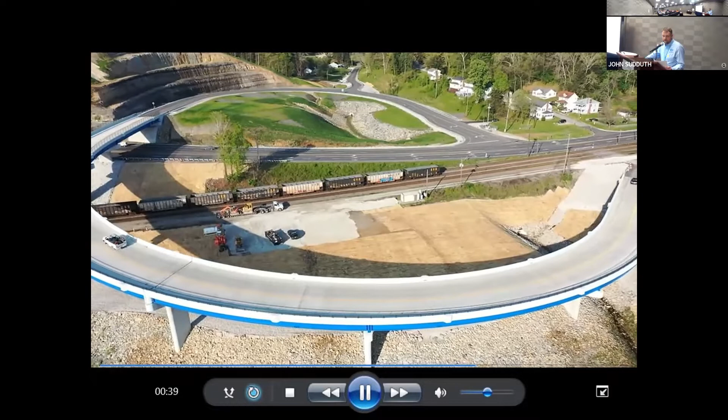Everyone for being here. We're here for the structures track. The project we're talking about today is Greenup County, Kentucky 244 bridge over US 23 and the CSX Railroad.

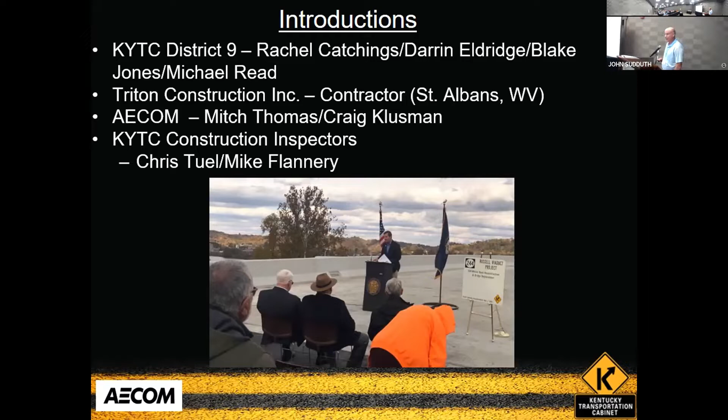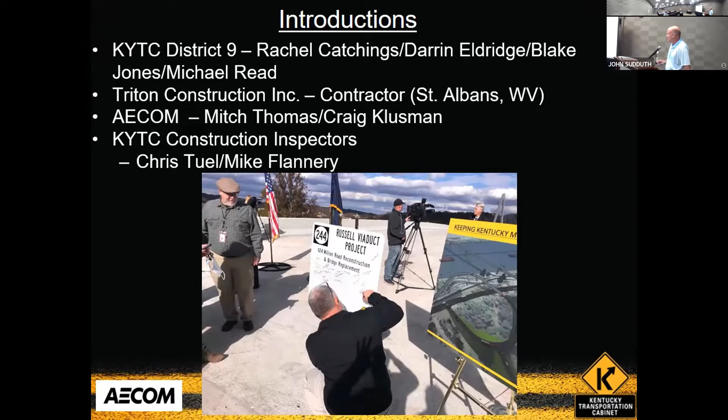And had a nice sign there, presentation, Rocky and everybody was there, so it was pretty cool. So as soon as the governor left, all of a sudden you got this guy up here, he's facing the sign - the bridge hadn't even opened, and he's already writing on the sign over there. Yeah, he's sitting up here in the front row. But yeah, just a little bit of fun. I thought that sign was pretty cool to show, and I think a pretty good presentation to everybody involved with the project. Michael.

Working, yeah. Okay, so we just want to give you all kind of an overlay of the area, just a lot of stuff going on up there. So as you can see at the top, there's the old Russell-Ironton Bridge, and that was actually replaced by the cable stay, the Oakley Collins Memorial down there. You can kind of see our bridge that we're replacing there is the 244 viaduct bridge.

And then right off to the side of that, which you'll figure out later on, there's the mountain right there, that's where we ended up with a big rock cut. I definitely want to point out the CSX tracks there - there's 3 tracks that run through there. They're pretty active, I think they get 30-some trains a day through there. And obviously you got US 23, and then at the top up there, that's actually one of the few other ways in and out of Russell.

That's the Ferry Street underpass, which is vertically and horizontally deficient as far as width, which is what makes this bridge so important for getting in and out of Russell. It's the only real way for oversized vehicles, or even trucks of any sort, to get in and out. You're between a rock cut and a hard place, river, railroad track, for ingress and egress of larger vehicles into downtown Russell. So those four key elements really hit home doing this project, which we'll talk about more as we go.

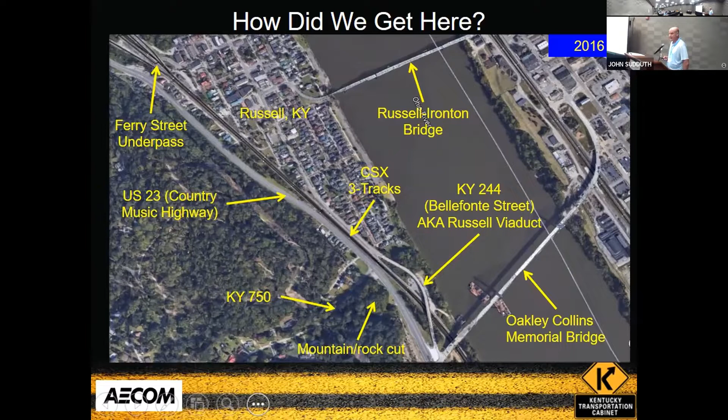So you can see that was from 2016, so everything's changed since then.

Moving forward, you had the Oakley Collins, the cable stay structure from ODOT that linked Russell and Ironton up, replacing the structurally deficient bridge that went to downtown Russell. Initially it was way over budget and had to be rebid. At the time we were URS or AECOM, so Craig and all the structures people looked back and did some value engineering to knock some cost off of it, like reducing shoulder widths and sidewalks and things like that.

Construction ran for a few years, and one of the things that drove this whole project was it was driven by ODOT, then tying across to Russell, Kentucky. We call it Russell to Ironton, not vice versa, since we're on the Kentucky side. There were intersection issues with Kentucky 244, US 23, and the new cable stay structure coming from Ironton, Ohio.

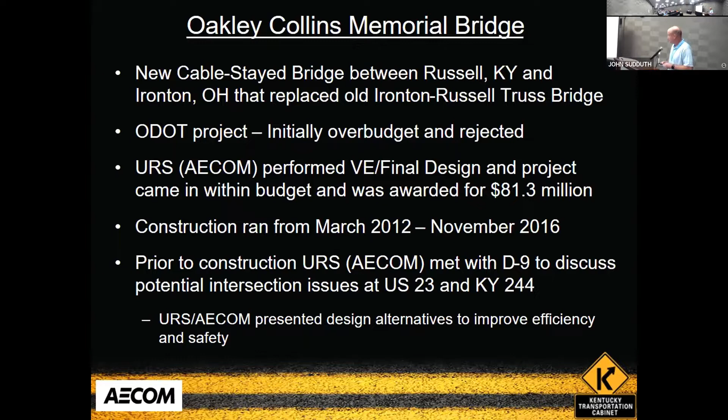If you look right here in the front of the picture, at the bottom of the screen, that's the new cable stay. You can kind of see the old viaduct bridge right there that it's replacing. It made a very interesting intersection there, basically a T, but then you throw an extra leg into it. The actual Ohio River Bridge is also on a skew a little bit, so the lanes really didn't line up much at all. And then you also had the old Russell Ironton Bridge at the top, which isn't there anymore, as you're about to see.

So one thing key in on was this crazy intersection here. We've got some good slides to show it, and what happened with it.

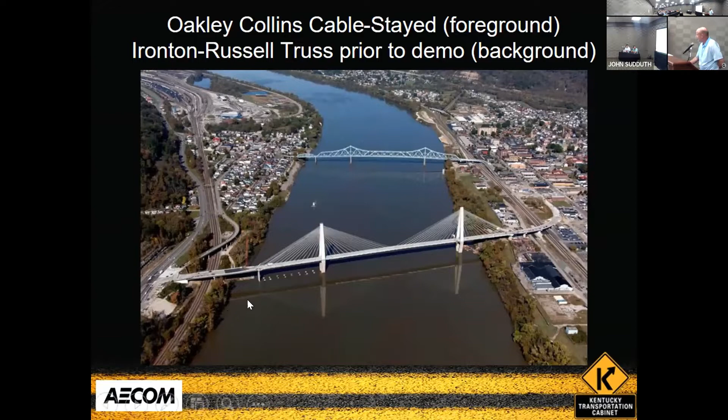So some trivia if somebody's scoring at home, and if you want to win a free lunch or something: it was the first bridge across the Ohio River between here and Parkersburg to Cincinnati. So it's kind of cool. It was there for a long time, and she was officially demoed in 2016.

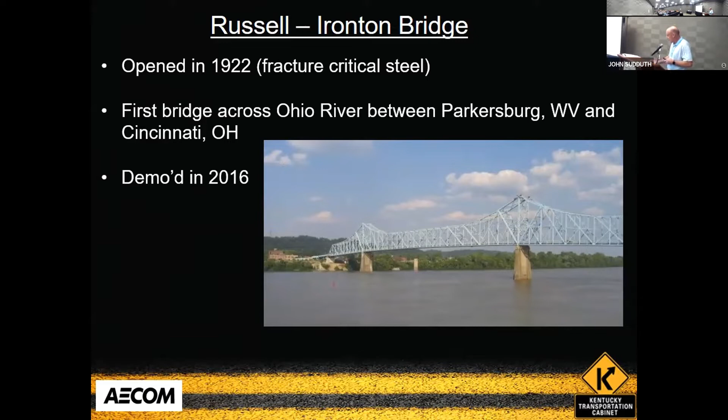One of the rules for horizontal intersections is 15 degrees skew. I don't even think this was in the ballpark, in the other direction. One of the things with this, it's a crazy intersection, we have a different term for it. I'll show you a little bit later.

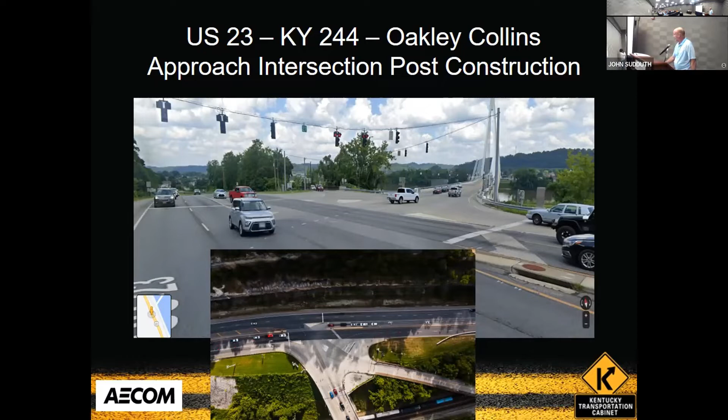You're coming here from 244, if you want to continue north on US 23, it's just severe skew. Every time we went through there, I had no idea if I was going the right way or the wrong way, because you're not even pointed in the right direction there. So we saw this, talking with the district, we need to get this on the books and get this issue resolved before it gets worse, because obviously when you have that tremendous skew in the intersection, your traffic operation is going to be extremely poor, which we'll talk about here in a second.

So just some of the issues with the bridge at the time: with 244 being structurally deficient, the weight limits were pushed way down at that time. The bridge was literally moving over the railroad track, and just all kinds of other things going on.

This section of US 23 has the highest ADT in District 9. So trying to cross back over 23, which we'll show you in the video, and then maintain traffic into and out of downtown Russell, with trucks, delivery, CSX, and so on. If you see it there at the bottom, that's a technical term we put there, it's a Muy Loco intersection. So by the time you see the sign that says Bienvenidos Kentucky, you're in the Muy Loco intersection, and you're going to go crazy - that's what's going to happen eventually.

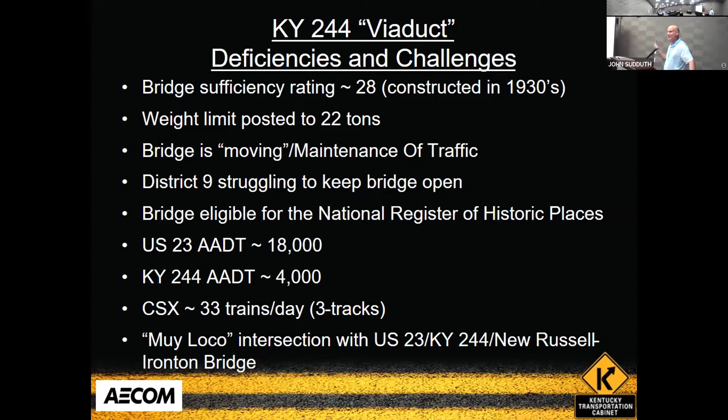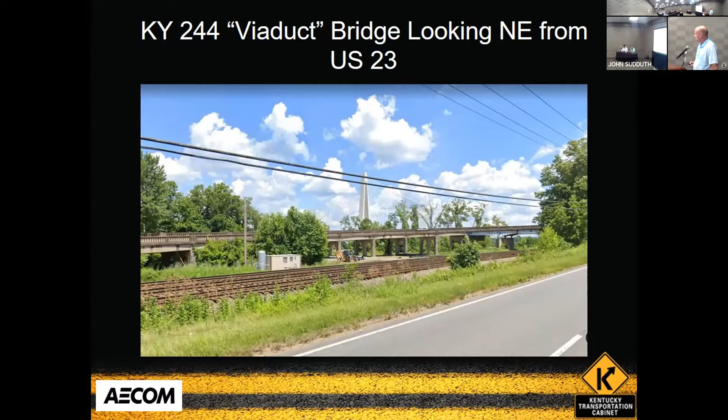I just wanted to show a view from US 23 of the old bridge. It had 19 spans, and the next picture will show a closer view - it had a pin and hanger steel span over top of the railroad. There's actually 3 spans there, but that was one of the main issues - they couldn't check the pin and hanger and didn't really know. We had quite a bit of other issues with it too.

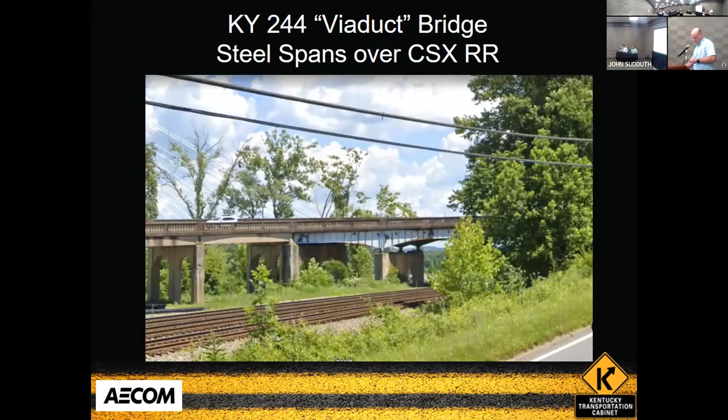We meant to patch a hole in the deck and ended up pouring 10 yards of concrete. It's kind of fairly rotten, honestly it's a maintenance headache. Here's another view looking down at it.

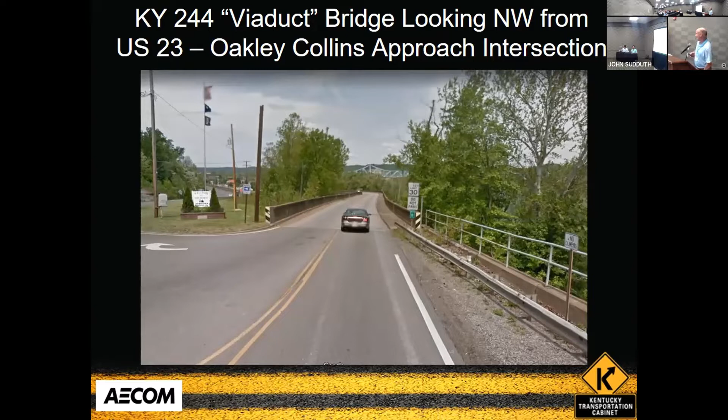As Mitch mentioned earlier, it was actually moving - there's a triangular wedge section that we ended up bolting there, and it's actually scooting over. You can see it in the sidewalk, the railing - several, maybe 6 inches, a decent bit, and it's moving out. Many times we were out there on site visits, you could literally feel it vibrating. Still, you can feel it. Especially if a truck goes over it, the whole thing bounces up and down with you.

So some other issues here, just kind of summarize again. Going forward to final design, we were obviously selected to do that. Myself and Craig led our side as a consultant in the district. We had Michael, Blake, everybody else, Rachel, Darren, on the district side.

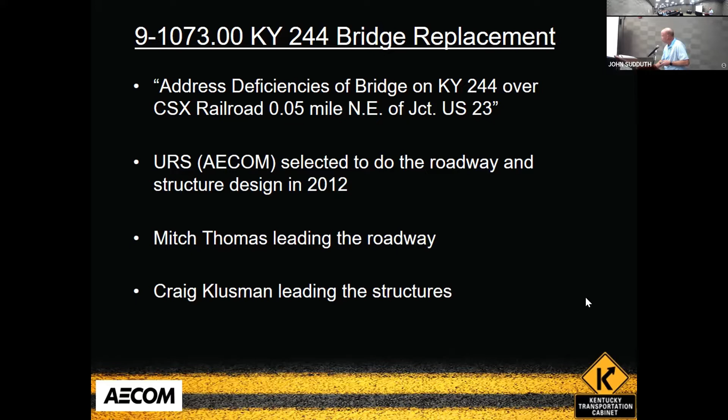So just to run through these preliminary alternatives real quick - we looked at 7 alternatives. For the initial alternative, remember the 4 key things: we've got to get people in and out with large trucks to CSX and the local gas stations, be able to maintain traffic, and so on.

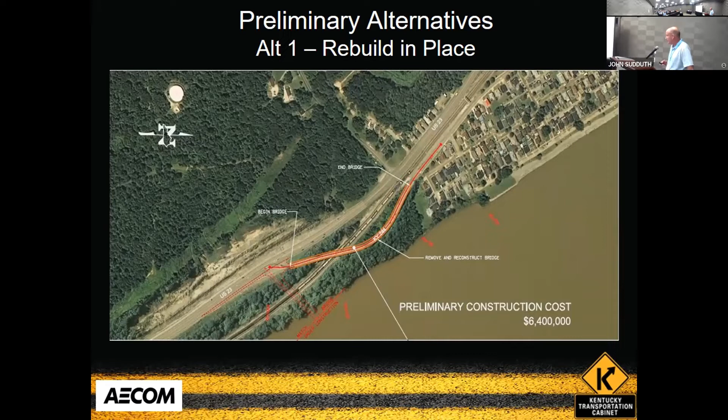One of the alternates - we looked at anything and everything because you're literally in a very tight spot there. You've got the river, rock cut, US 23, very active rail and so on. So we said, all right, let's start from the top here. This option just basically put it back in place, but then by doing that, you've got to close the roadway. That didn't work out too well eventually.

So we looked at alternative 2. Michael talked a little bit about this, using the Ferry Street underpass - you curve through here with the S. We actually met with Russell EMS, and they even attempted to deflate the tires and tried to go through it, and they still could not get through due to the curvature and the vertical. It just did not work, so that wasn't a good idea.

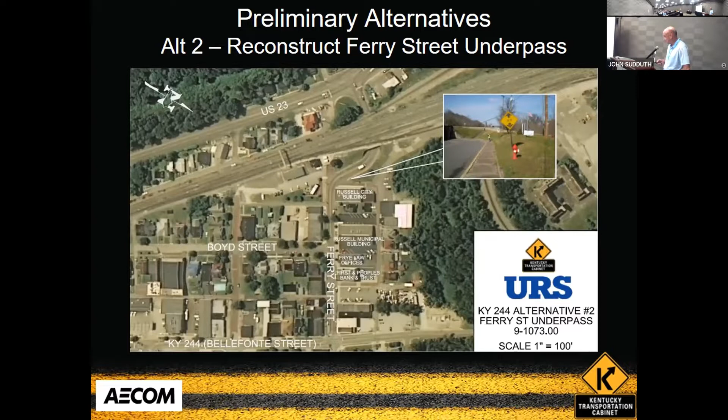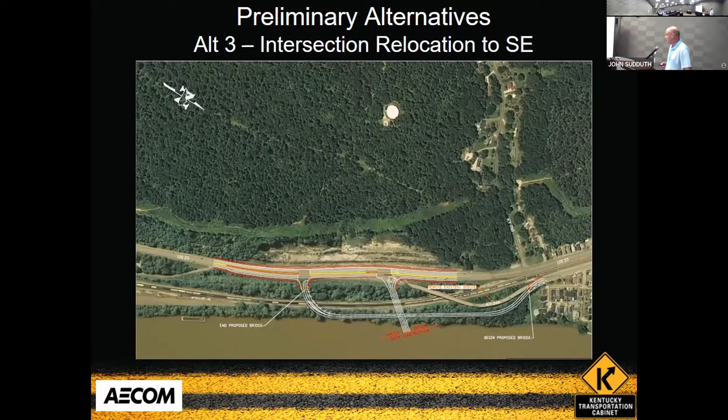So then we looked at this one - started to get a little crazy. We said, hey, let's go underneath the new cable stay structure and then come back and tie US 23 just to the east of the new bridge. Of course, these drawings are back in preliminary line and grade, where the cable stay structure was not yet constructed. This was extremely expensive back then, and you're running everything down in the river, and you've got to shoot up over the railroad, and your grades just didn't work out too well. But it was an idea.

So then we looked at, hey, let's find that sweet spot crossing 23, so we can clear the rail, we can clear 23, get our vertical where we want, and then swing back over to more of a traditional type intersection here where we straight-line with the new cable structure.

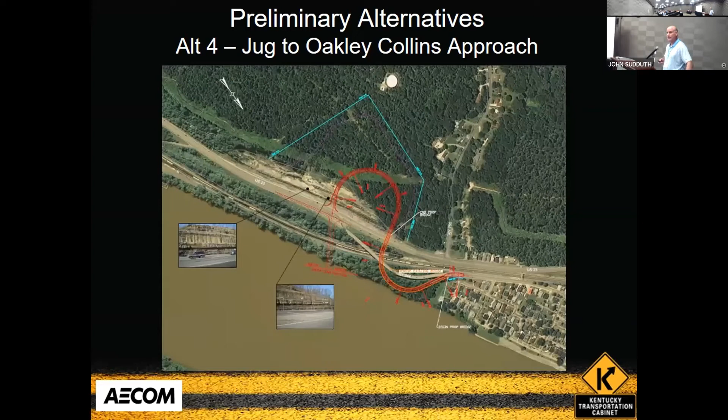It looks pretty on paper, but then you start doing all the engineering, you're talking about over 1 million yards of cut that affected a water tower and just major impacts with this.

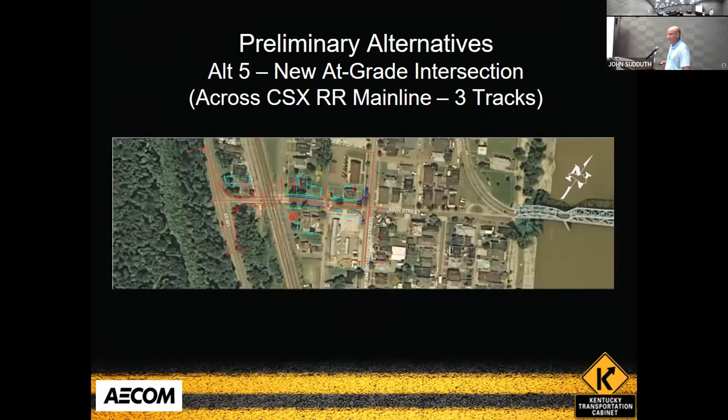So we looked at putting in an at-grade crossing, which used to be there, and CSX quickly denied that, so that alternate was nixed pretty quickly.

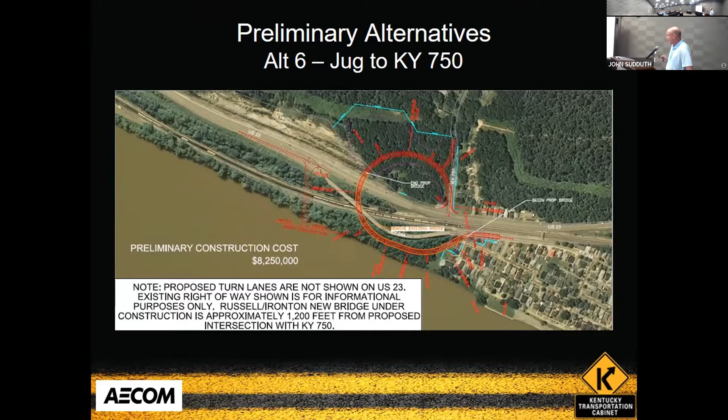So then we looked at the other one, we straight-laid the cable stay structure. It's kind of a really weird shape, kind of a jug shape, trying to curve back over to 750. The reason we did that was for the traffic components. By moving it downstream off the cable stay structure, it improved traffic operations for both intersections with 750 and the cable stay structure. The big negative was the grade back to 750 and trying to get that right.

So we said, all right, let's go back to the drawing board. Jordan and I looked at this and said, let's push this out and flatten the grades. We held our same profile over CSX 23, and then by pushing it further south towards 750, we were able to really flatten that grade and then tie down to 750.

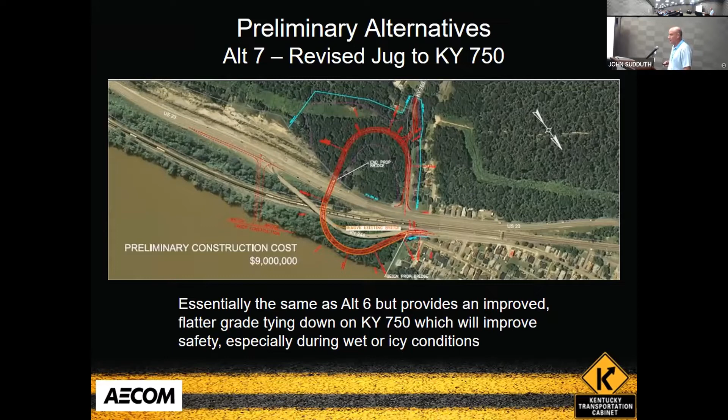So we're kind of thinking, all right, this looks like a home run to me, but then we went from there to the stakeholders.

That's what I say, after we got all our alternates, kind of have pros and cons, most of them even saw they weren't really feasible necessarily. I said the best option, if you could have closed the road, was to put the bridge right back in place, but they were very concerned with that.

The city couldn't get, like Mitch said, their fire trucks and EMS in and out. They're concerned about getting gas trucks in there to the gas station. CSX was concerned with it too. It's kind of one of those things, the bridge is going to have to stay open, or they really want to stay open and be able to get in and out throughout construction.

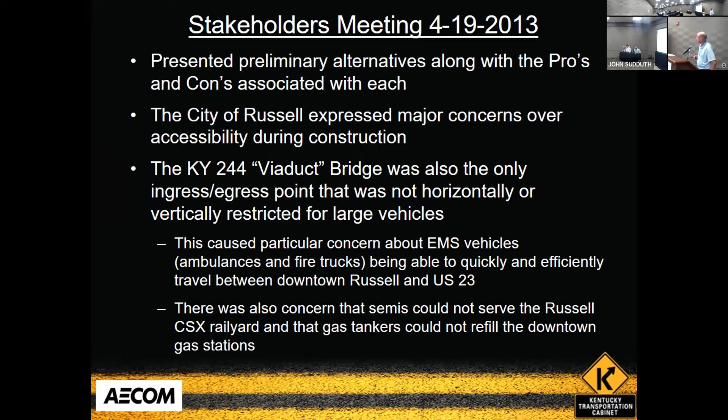So in order for them to actually get into Russell with their emergency vehicles, they would have to circle all the way up there to Worthington at the top almost, and come all the way around, which added a significant amount of drive time to it. You're talking probably 20 minutes just to get in and out of Russell that way.

So there, kind of did a little foreshadowing earlier. Basically all those previous alternates 1 through 6 were quickly eliminated, and then we went to alternate 7 as preferred, just due to all those issues, minimizing rock cut excavation. Being able to maintain traffic here during construction was a challenge, Craig will talk more about that in a second.

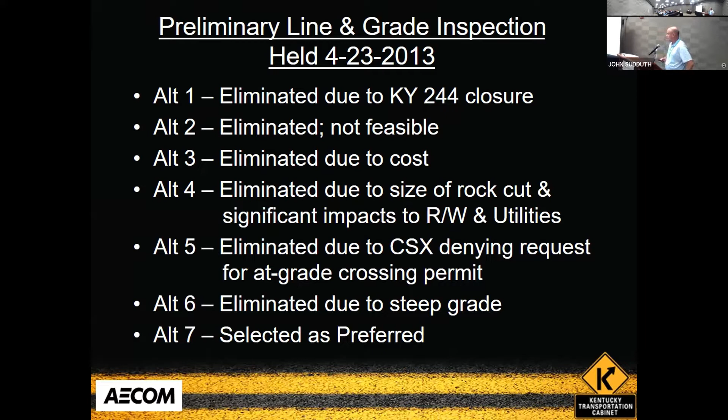Then kind of just more of the same. It really came down to alternate 7 versus 6, and 6 was so steep, it was eliminated from there. But overall, 7 just improved everything, it was far and above the best alternate there.

And then the other caveat to it was it improved pedestrian linkage in downtown Russell to the neighboring areas. We did some sidewalk projects with the city of Russell, Mayor Simpson there, the avid runner, and he's tickled to death to see this bridge go in, just kind of opening up downtown Russell with linkage for running, walking, biking, whatever y'all want to do.

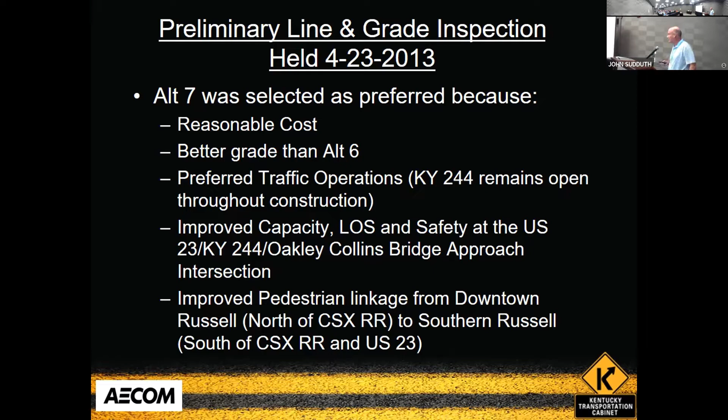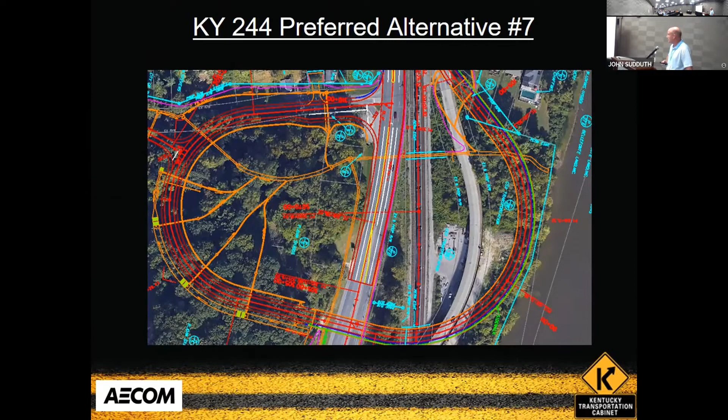Once we started into the actual design, as Craig's going to talk about more, there was a lot of horizontal and vertical work just to make sure we kept the clearance over top of the old bridge. We ended up keeping 12.5 foot, which went back and forth quite a bit. The state representative at the time, Tanya Pullin, we had to explain why we wanted to build this option, since it costs this much more than building it back in place, trying to explain ourselves.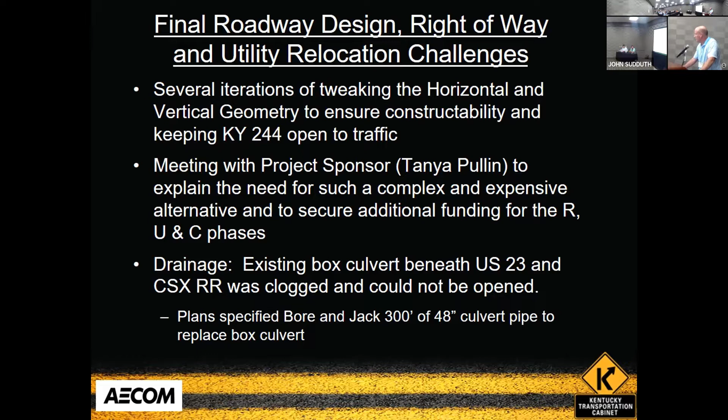One other important thing is the culvert underneath US 23 was actually plugged up, so we ended up boring and jacking a 48-inch pipe, close to 300 feet. It's a pretty good sized thing. It was originally put in a long time ago - at one time it was a coal pit, and water, sewer, and everything else was also handled in the construction with the project by the contractor.

So again, just some more highlights with Kentucky 244. We've talked about all that.

Craig's bread and butter, the bridge length is over 1,107 feet, and we're looking at 250,000 yards over about 1,200 feet or so.

And the bore jack was pretty cool. Chad and I went down there and saw them do that over that distance. It's one of the longer bore jacks that we've seen here.

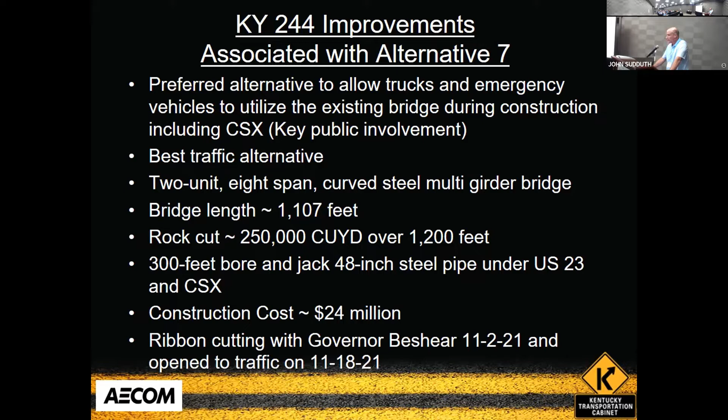Construction costs were around $24 million, and then there was the official ribbon cutting.

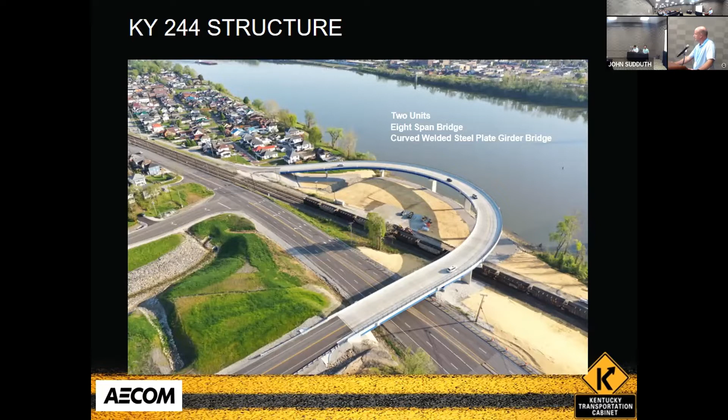As Mitch said, it's a 1,100 foot structure length with a really tight horizontal radius of 310 feet. The difference in curvature from where you get on the bridge to where you get off is 143 degrees - not quite 180 degrees, but still a substantial change in direction across the structure.

The typical section is 2 traffic lanes and 2 shoulders, 8 feet each. We also have a sidewalk on the structure and a type 3 barrier wall, plus some chain link mesh over US 23 and the railroad.

We designed using MDX software for the structural design, and we verified the results in CSiBridge.

One thing about the curvature I didn't touch on - since this links to downtown Russell as an urban street, we treated this as a low-speed urban street type design, geometrically 25 miles per hour with a normal crown. You're not going to get much benefit going 60 miles an hour because you have to stop anyway, as mentioned with the DOT speed.

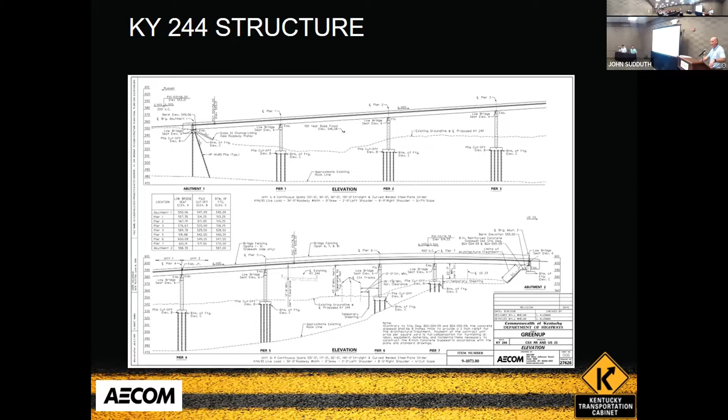They did not have to be analyzed for case 1 with the traveling vessel, because in normal water those piers are fine. We were doing coordination at that time with the KYTC, and it's like, are you sure you need to do that? And then sure enough, I was telling Sam earlier that about that same time, a barge got loose here downtown, and it got stuck over here at the Falls of Ohio. It was over there for a long time before they were able to get that out.

So the piers are hammerhead style piers, and we utilized a form liner on them. Looks really nice. There's me in the picture there for scale, and you can see the Ironton-Russell Bridge in the background. I believe this is Pier 3, so this is one of the piers that would be underwater during a 100-year event.

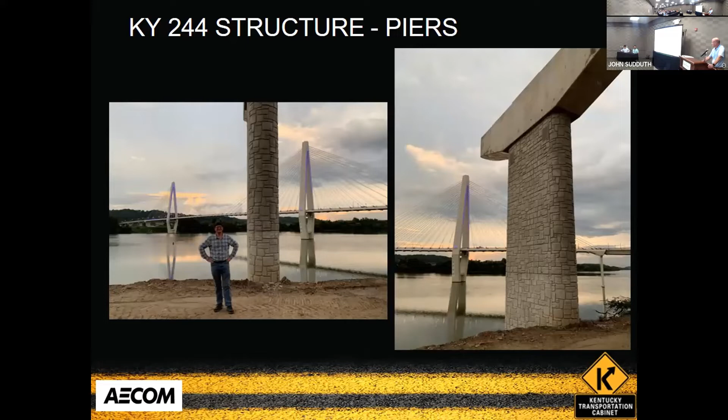Okay, talk about the vertical clearance challenge we have here. As you can see in the bottom left graphic, span 6 traverses both the CSX Railroad and the existing Belafonte Street, KY 244. So we got as close as we could with the pier to the railroad with the requirements. And then on the 244 side, we did the same thing. But we really wanted to minimize that span.

So the hammerhead pier, as you can see in that bottom right photograph, actually violates the existing barrier wall on the existing bridge. I may or may not have been driving when I took that photo, so ignore the reflection there. But yeah, we accounted for that.

We knew it was going to be tight clearance, but we went ahead and had them close the sidewalk and put that barrier wall up around it so they could remove the barrier wall to construct the pier cap. And you know, top right, you can see it's really, I mean, 12.6, it's not much. We were really crossing our fingers that during construction nobody would come and hit those brand new girders. But that was my biggest fear, you know, you got this brand new steel up there, it's gonna get hit before it opens to traffic.

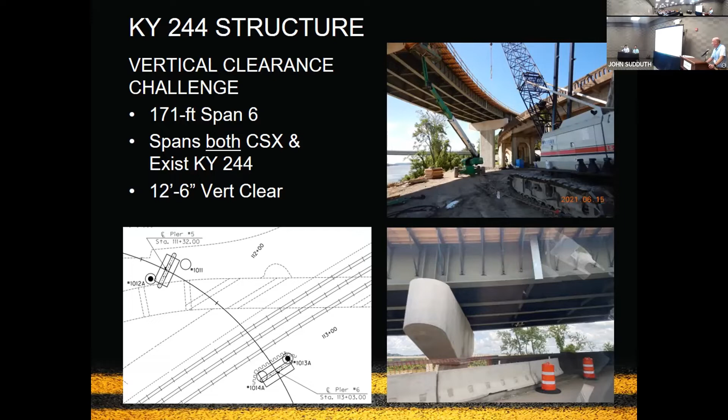And we checked and checked and checked, and then we checked it again, and we checked it again to make sure that vertical clearance was good through there on every little point. I think Chad even questioned us after we did all the checking, but we checked it again. It was tight, so we worked it out. I think Freddie made mention that they did have to take off a piece of the sidewalk through there, but other than that it worked out all right. One thing I forgot to mention, the girders are 66 inches deep, welded steel plate girders.

So kind of a little technical slide here, talk about the bearings we utilized. So as I said before, it's two units, right, Unit 1 and Unit 2. And it was primarily, we decided to design the bridge with two units as opposed to one unit to handle that 143-degree change in temperature, the 143-degree change in rotation through the structure. Because what we did here, just for Unit 1 as an example, we fixed all the bearings at Pier 2, and then we used a combination of unidirectional bearings and multi-directional bearings at the other substructure units.

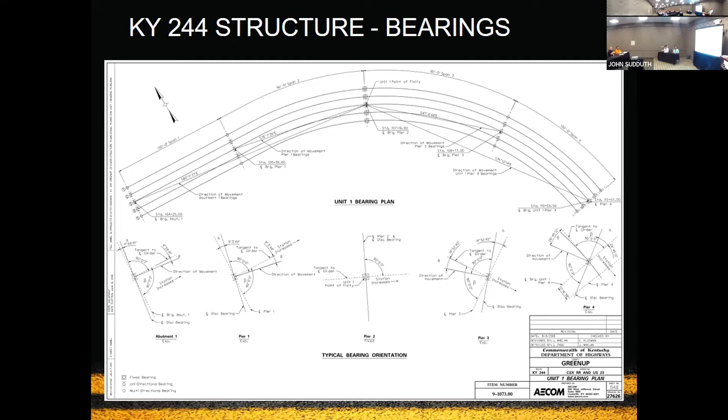So the anticipated movement that you would have from the bearings, which would typically on a straight bridge just be along the center of the bridge, but here is actually, if you would draw a chord from the center of, say, you can see it best maybe at the far right there at Pier 4, to Pier 2, that's the anticipated direction of movement that you're going to have due to temperature loads. So we orientated those unidirectional bearings along that line, is the intent. And we utilized disc bearings, which I photographed in the next slide, that were going into the project during construction.

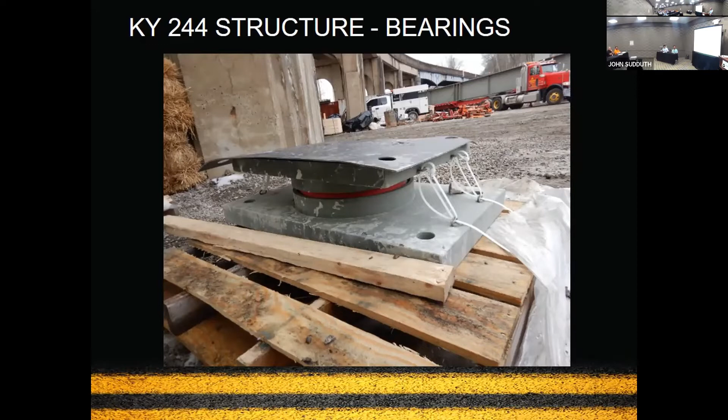Kind of a cool picture here too in the background. You can see there's a girder that's been delivered to the site, waiting to be erected in place.

Next slide. Speaking of erection, we had a scheme and the plans for a possible erection that the contractor would follow. We did the engineering for it. You can see there's maybe 30 steps here. It had 6 temporary supports, just to prove there was a constructible way to build the bridge.

Of course the contractor didn't decide to use this scheme. He decided to use a different method. You can go on the next slide, Mitch.

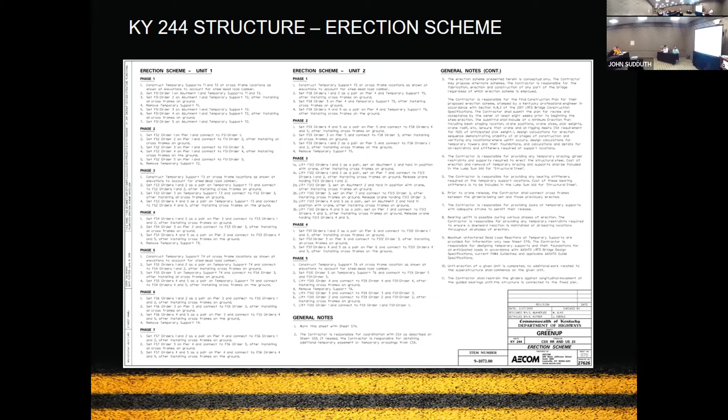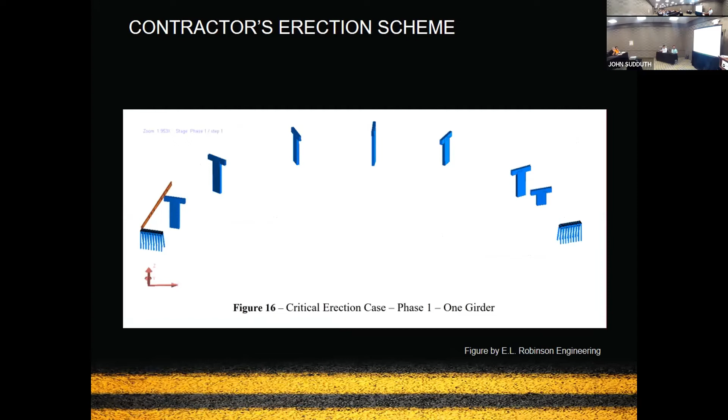So these slides I pulled coming up here are from the contractor's erection scheme. E.L. Robinson was the contractor's engineer on the project, and they proposed their erection generally from left to right. The most critical stages were when they had just one girder in position, because once they got two or more girders in position, they could connect the diaphragms and the bridge was more stable. But of course they did engineering and checked all these different stages.

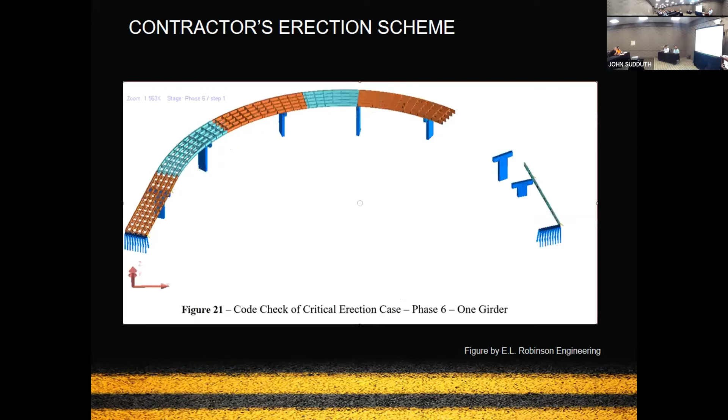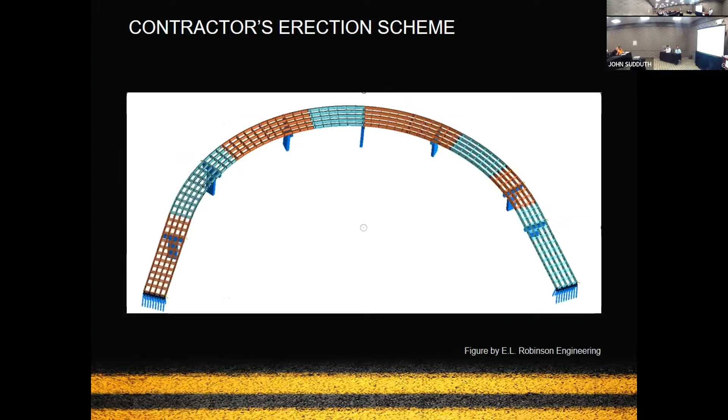So they went ahead and built the span over US 23 on the right, and then did the final installation over CSX and the existing 244 bridge. So there's the completed scheme.

That's pretty cool. We went out to the site one day and watched them put some sections into place. Here they've already got the two girders, and it looks like here they're putting the third girder in place.

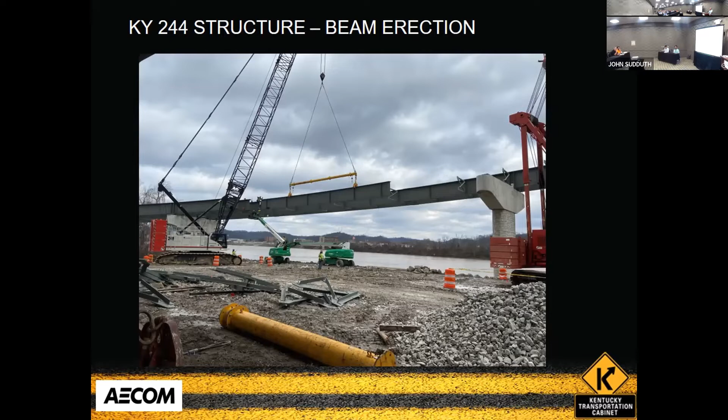But instead of doing temporary supports, they had a series of two cranes out there. So when they had this piece in position, they had the steel ironworker bolt up that section. Then, next slide Mitch, they brought the next piece in while the first piece is still being supported by the crane.

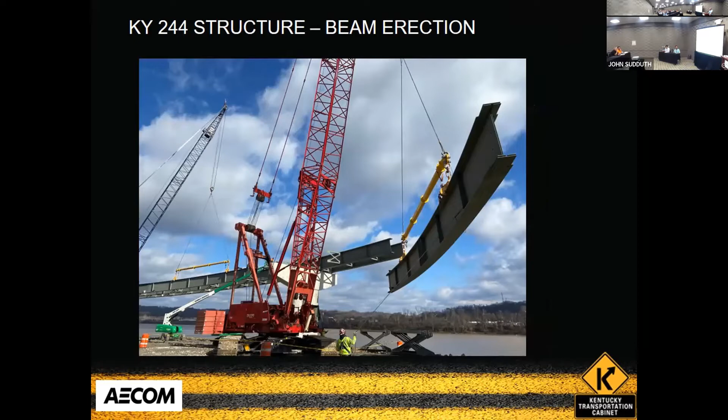Once that next piece is bolted up and supported, they could go ahead and release both cranes and the structure is stable. I think there's one more slide, maybe.

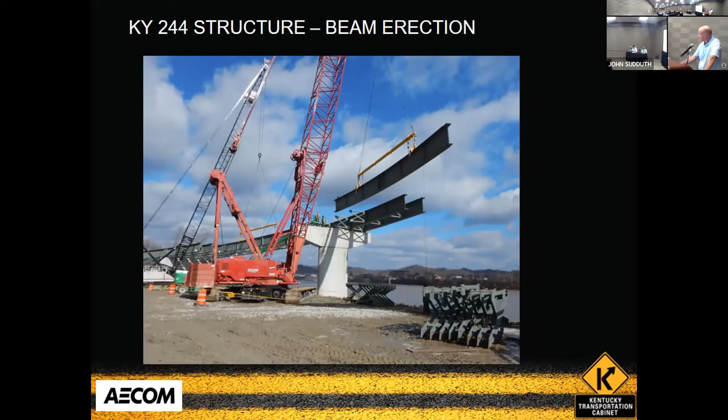Yeah, there we go, showing them put that in. You can see the diaphragms, the cross frames, are already waiting to be bolted up. And then there's some cross frames there on the ground for future steel erection.

Here is one of the ironworkers bolting up a splice. It's kind of a fun photo here. And that's kind of it on the detailed structure stuff. We've got a lot of construction photos that we'll take turns talking about as we go through.

This first one showing the sidewalk there and the new Ironton-Russell Bridge in the background.

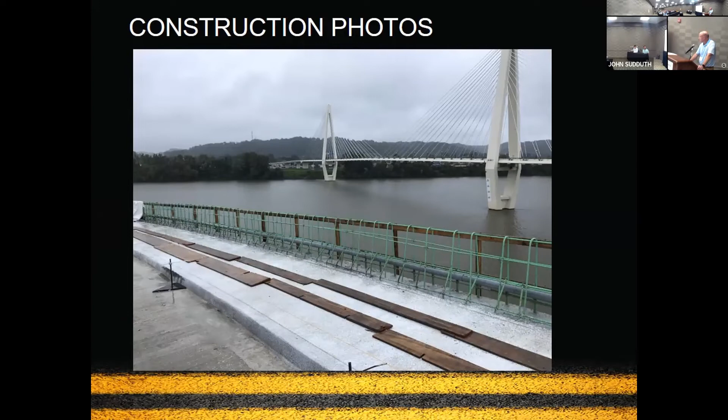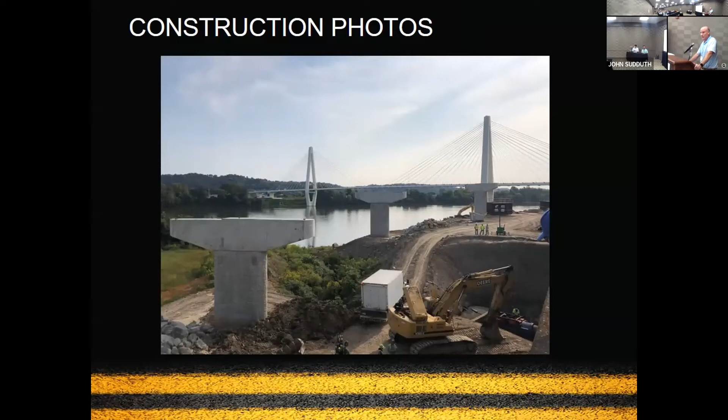You can see the excavator, kind of cool to watch that machine in place. I think somebody said they only broke a couple of bits over that distance through a lot of rock. Pretty good.

There you go, another shot of them. And one of the things on those, the bore pit always gets away from them. It's incredibly deep, 40+ feet deep or so.

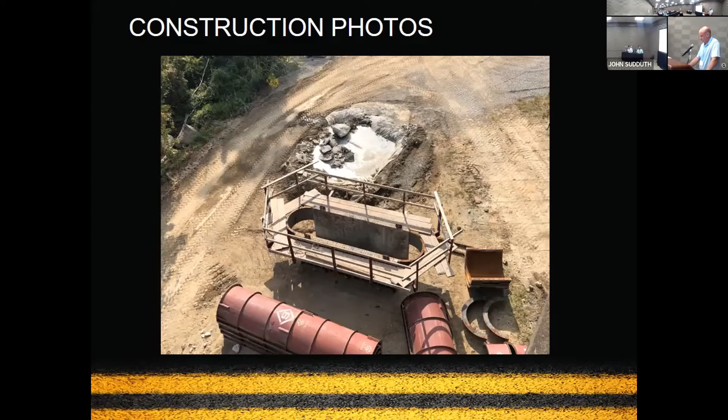Oh yeah, there's a form, not a form liner, but the form for the pier columns.

So roadway excavation work over there on the opposite side of US 23.

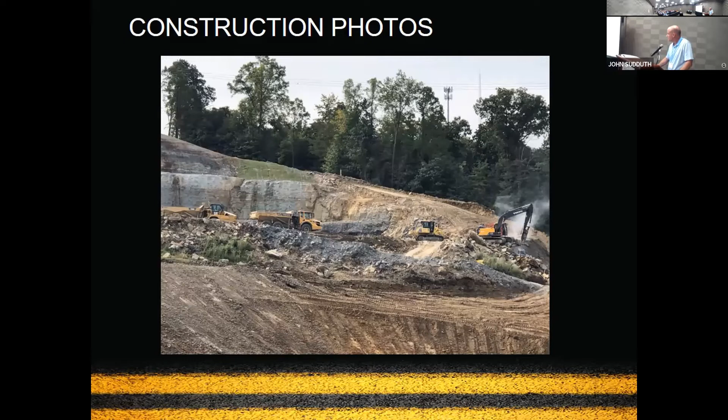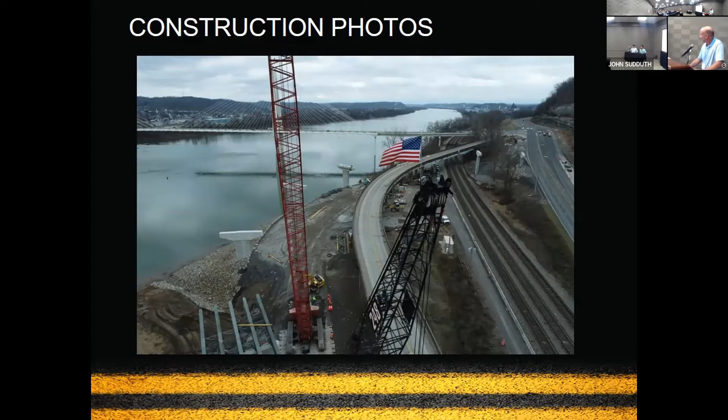Nice photo here with the American flag. Yeah, Chad, you do the USA. Really cool photo there showing the roadway excavation.

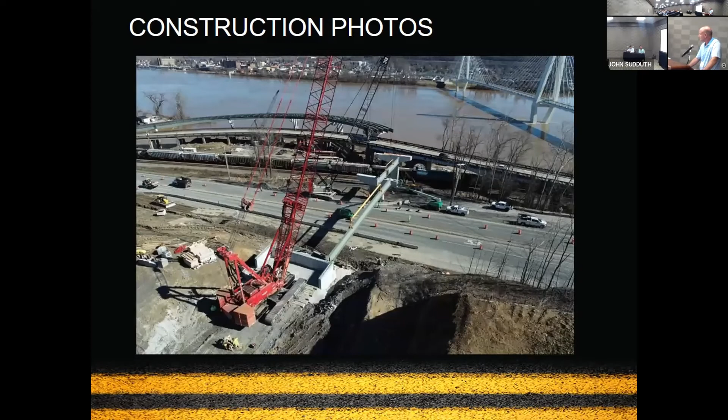And then there's the first girder over US 23. There's some epoxy coated steel. A lot of steel on this bridge deck.

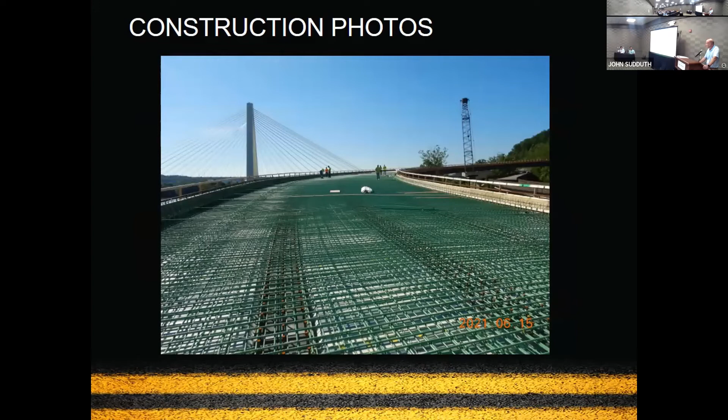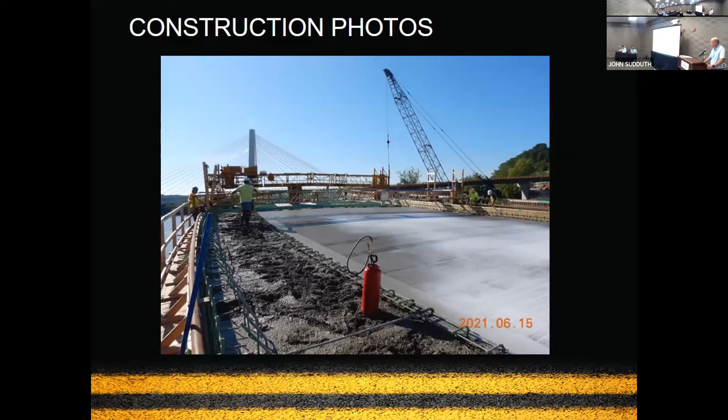Oh, there's that tight clearance again during construction. Showing it from the deck level, it's really cool.

And there's that joint, the deck there on the old bridge. It was giving them a lot of problems. That's the existing bridge.

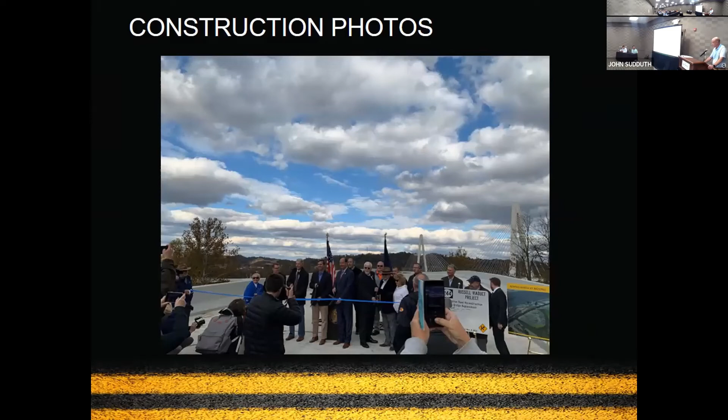Ribbon cutting with the governor and other dignitaries. There's the sign that Chad was in earlier. Without Chad.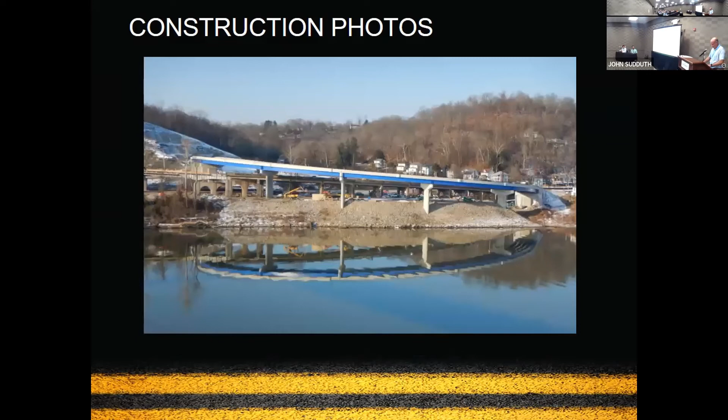A cool photo again from the river.

That's really it. I'll play the video again, and I think we've got a few minutes for questions.

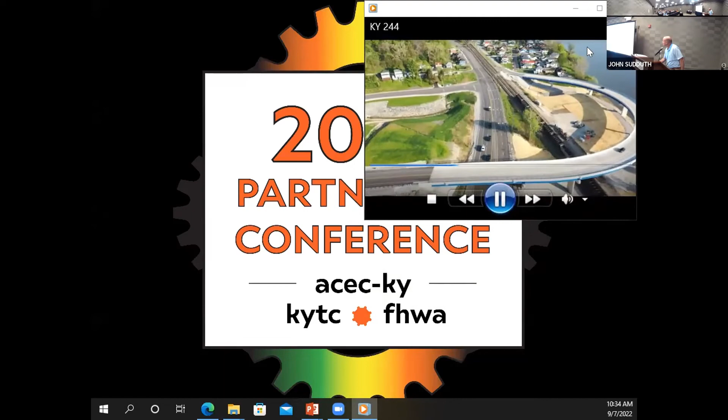Any questions? So the clearance for the emergency vehicles was critical to this. The 12'6" - was that enough for the fire truck to get through? It was, except that.

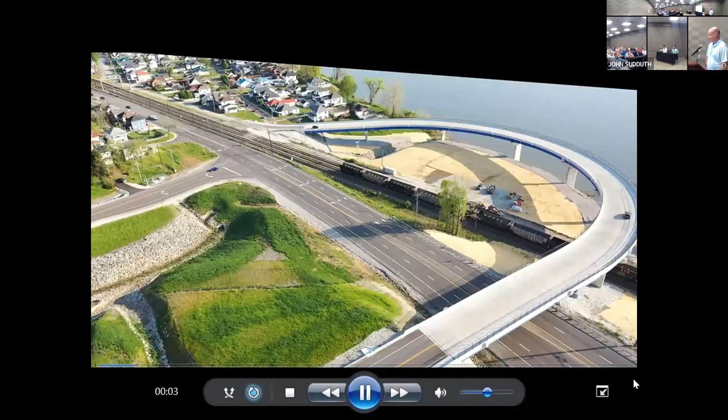Question from the virtual session: were there any issues with deconstruction of the existing bridge in regards to the new bridge? Yeah, the contractor did a scheme to take apart the existing bridge - B-Tech Engineering worked on it because they had that span with the railroad. I don't recall having any issues taking it out. I've never heard of anything about it. That's what they put their forms underneath - they actually laid them on the bottom flanges of the steel sections of those things, hammered out all the concrete, caught it that way, and then laid down there and took the beams off, but didn't hear of any issues. They made it look easy.

Is this the alternate we were working on in 2017? As far as construction, this is what got built. I can't recall - when did construction start? It's later than that, right? 19, I believe, could have finished up in '21. We were working on it back in 2017 for the design, definitely. And I was thinking that it was that alternate - yeah, that's right.

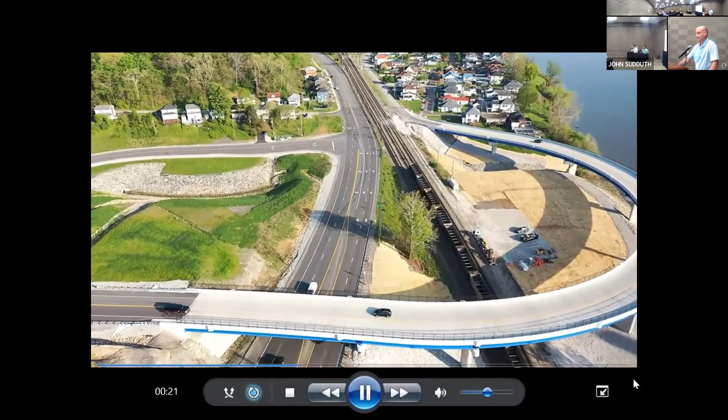It seemed like there was something kind of scary about how close it was to one of those existing abutments or something like that. They probably couldn't construct a wing wall, I think, because of the way that flows together - they could tell after they took all that service away. They tear all that out, but they actually get in there to finish the construction on that part of it.

One thing I forgot to touch on - if you look at the full picture when it's removed, it looks like it's supposed to have been there all this time. But with the CSX rail running through there, they had reversionary rights - I'm sure y'all have run into this before. So this was a unique situation where KYTC owned the right of way through the railroad, but where the railroad right of way approached on the preferred alternative, they had reversionary rights.

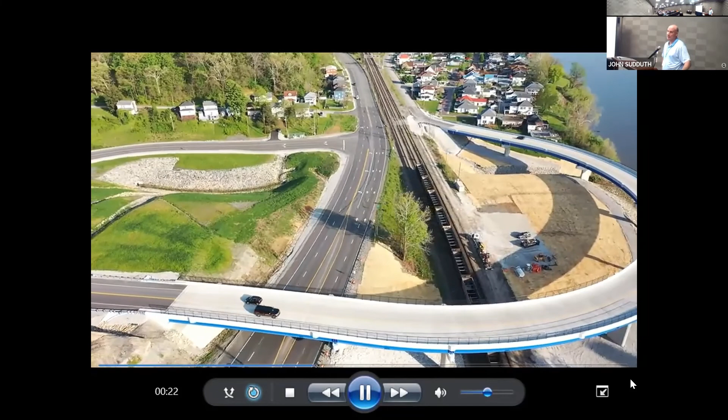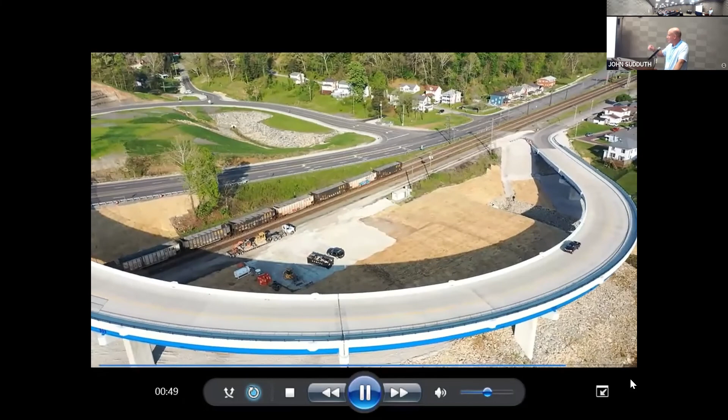So it was a lot of back and forth - sure y'all have battled those val maps from 1900 - and they said, well, put it on there like the map shows. Well, it's 100 years old, we're trying to put it on there. There's locks and dams that affect right of way, with surveying riverbanks and things like that. So we had to reestablish the reversionary rights for CSX, and then they got the area with the siding back - you can kind of see the siding there. So it's one of those deals - back in the day, building all the rails, they really knew how to go about doing those agreements.

So once we thought we had the right of way clear with CSX, then that popped back up. So it was just a lot of back and forth with CSX.

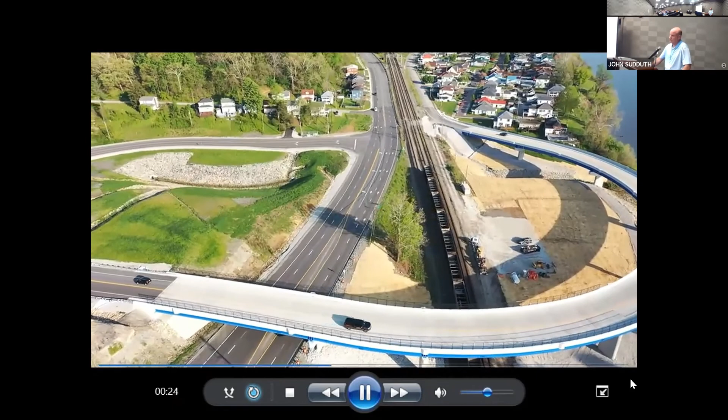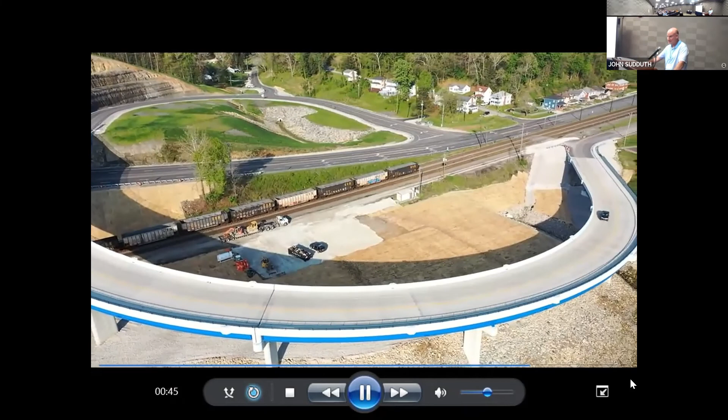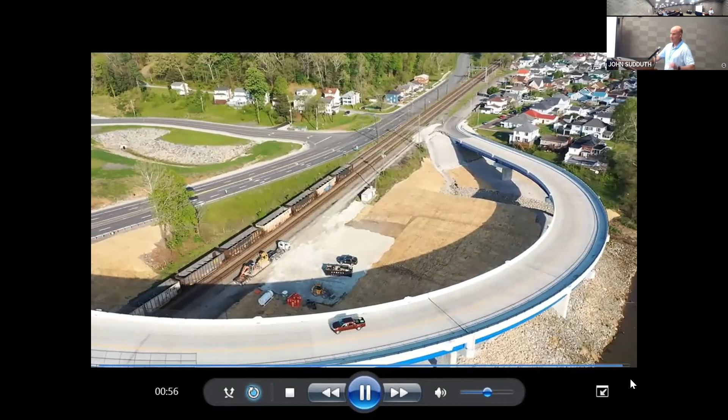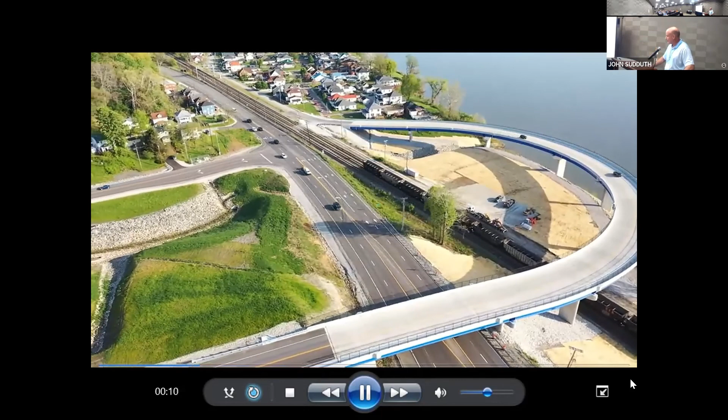So how was it draining - since you had to jack that pipe through, was it going somewhere else? It would basically pond - it was a double, real old double culvert, and then went to a single culvert underneath US 23. Ben Chinneberry actually crawled down in through there - I was like, golly, if I went through there, the first thing I would have run into would have been the biggest snake ever, because he would have been waiting. But it was clogged, and Rachel met the fire department out there, and they ended up just pumping a bunch of water through there to try to push it out and clean it out that way. But it was so silted and consolidated, the water just backed up. So US 23 kind of acted as a levee there, and the water would just sort of sit there.

And one minute left.